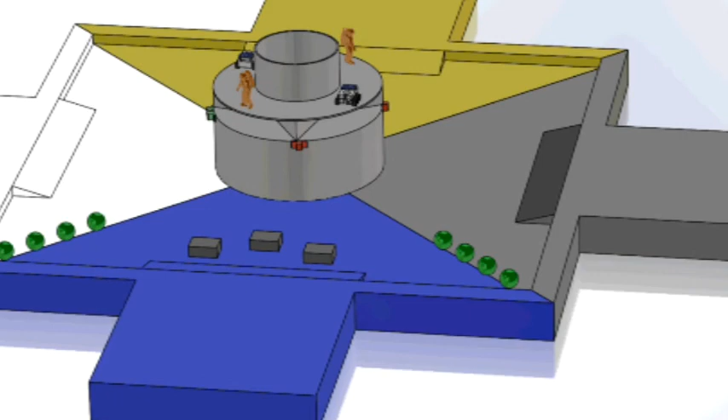The final design project presented 5 tasks to be executed by a machine. 1. Clear the surface of radioactive elements. 2. Collect rock samples. 3. Land spacecrafts in a marked safe zone. 4. Retrieve injured astronauts and their rovers. And 5. Place your country's flag. The 5 tasks will be executed during a 45-second time period.

These 5 tasks are incorporated in the House of Quality. The strongest relationships on the House of Quality are between the specific tasks and the kind of mechanisms needed to complete those tasks. One important negative correlation is between the requirement of fitting in the go-no-go box and reaching the center of the cylindrical cavity.

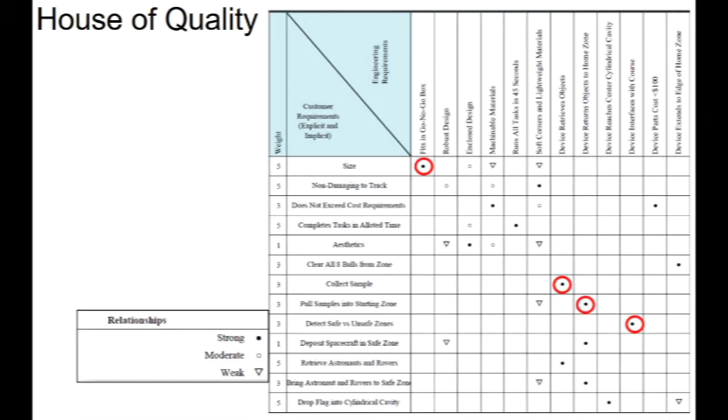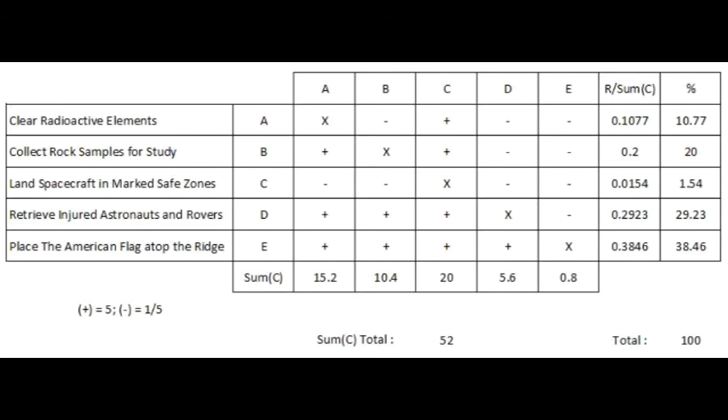The prioritization matrix indicates that the available resources should be focused on the criteria in the following order: place the flag atop the mountain ridge, retrieve injured astronauts and rovers, collect rock samples for study, clear the radioactive elements, and lastly land the spacecraft in the marked zones. Construction throughout the class was based on this evaluation.

The first design focuses on 3 tasks: pushing the radioactive elements out of the home zone, pulling the rock samples into the home zone, and retrieving the astronauts and rovers. This design utilizes an open base, a retractable arm, 2 extendable arms, and a scissor.

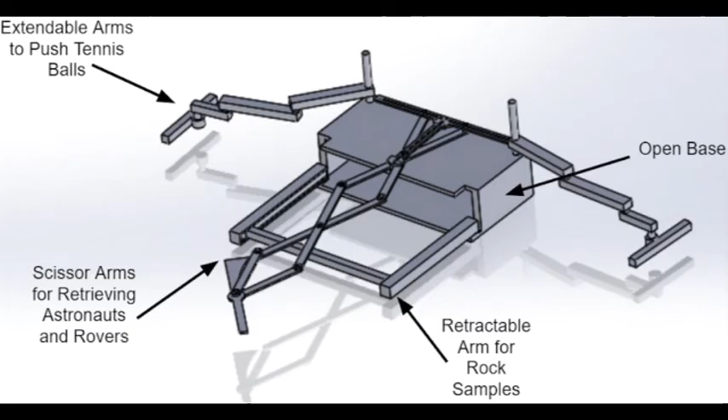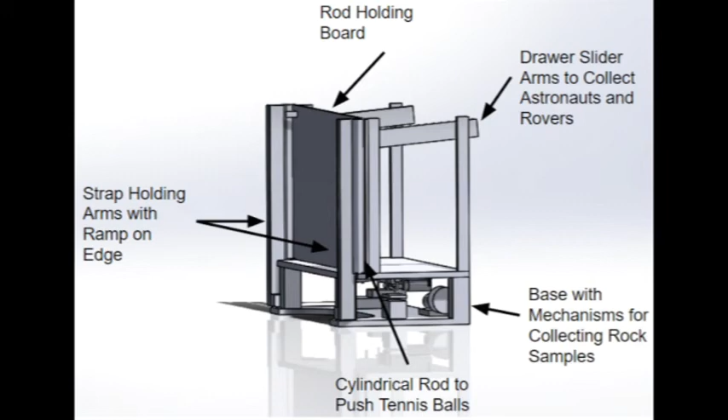The second design completes the same 3 tasks of pushing the radioactive elements out of the home zone, pulling the rock samples into the home zone, and retrieving the astronauts and rovers through the use of scissor arms, motors, and machinery. The third design attempts to collect rock samples, retrieve the astronauts and rovers, and remove the radioactive waste in the home zone. This design incorporates drawer sliders, a hook, cylindrical arms, and an open base.

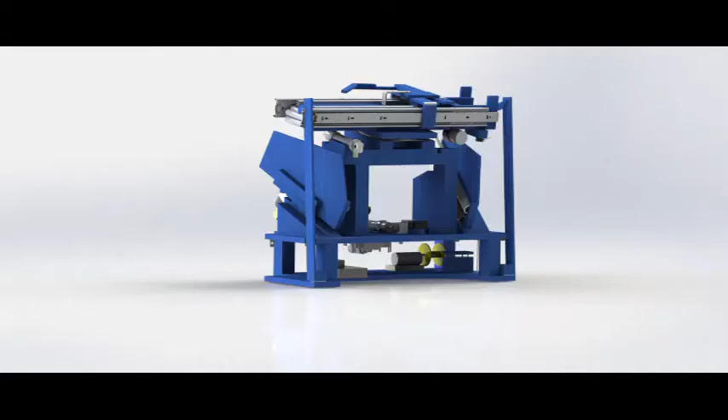The fourth design is based around a moving cart. This concept focuses on all tasks except for rock collection, utilizing a mobile system with extendable arms. The fifth and final design completes all 5 tasks with consistent accuracy. This design incorporates trigger arms, a strap, a throwing ram, a swiveling subsystem, drawer sliders, extendable arms, and a ball releasing mechanism.

The most unique aspect about our design is the horizontal orientation. We decided to go with horizontal orientation because of our initial design for the rock collection, which we actually still have. This is still the same initial design. So I'm going to demonstrate that for you as step 1.

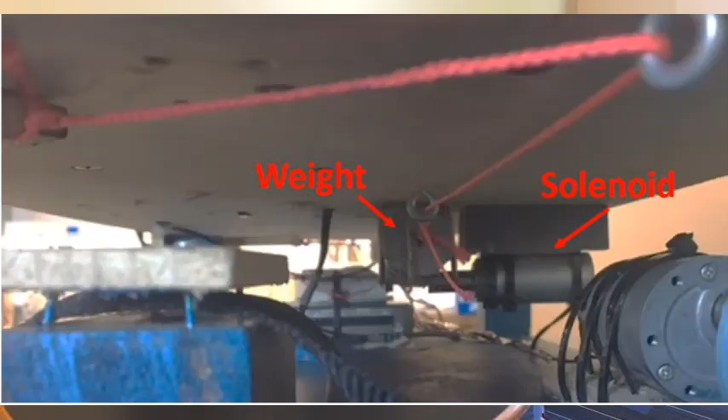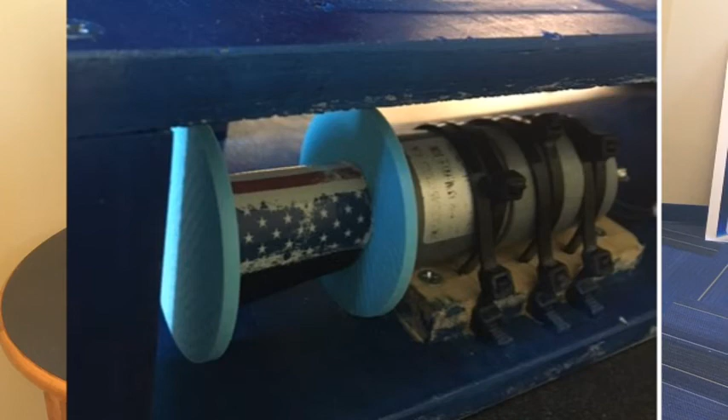So what happens is a solenoid back here pulls back, and a weight is resting on top of it that's attached to some strings, which connect to lever arms that drop these arms down. So I'll go ahead and show you that. The solenoid dropped, the weight came down, and the straps came out. Then a motor runs back here and winds up the straps and pulls the rocks all the way into the system.

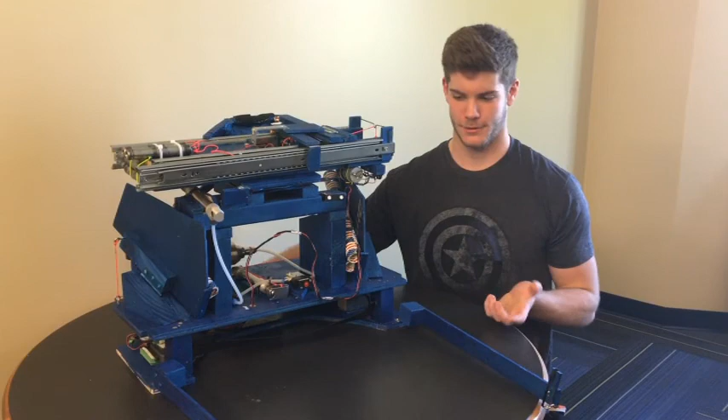After the rock collection, the second subsystem is fired by this valve, which releases the air from the tank into the 2 actuators here and here. The first actuator fires the tennis ball clearing mechanism, just like this. The second actuator is crucial because it allows us to maintain the horizontal orientation while still reaching the center mountain ridge. When it fires, the entire top system rotates and locks into place here.

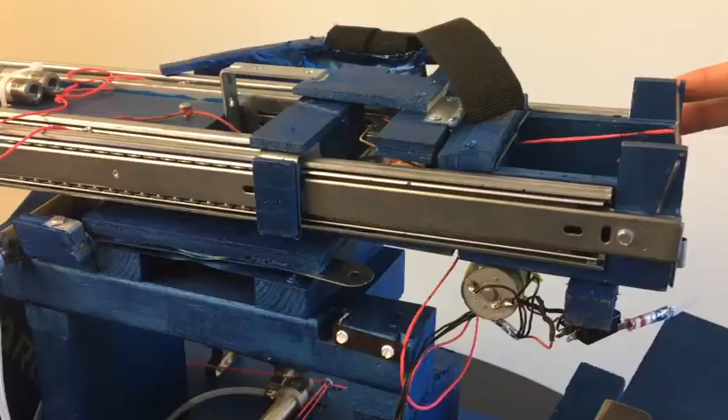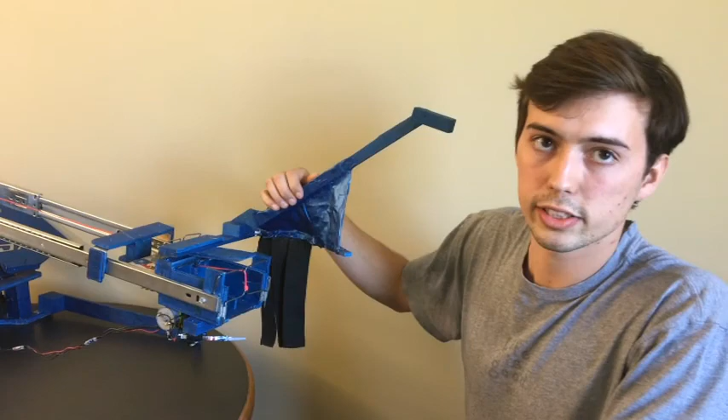The final step for our machine is reaching the mountain ridge system, and this is where most of the points are located. So we have an arm that fires, that deposits the flag into the cylindrical cavity, as well as collects the astronauts and rovers. The main issue we ran into while testing was the astronauts and rovers would fall through our arm, and then it would score points for our opponents. So we created this nice system that allows the astronauts and rovers to smoothly fall into our home zone. We also have these straps to prevent the astronauts and rovers from bouncing into our opponent's home zone.

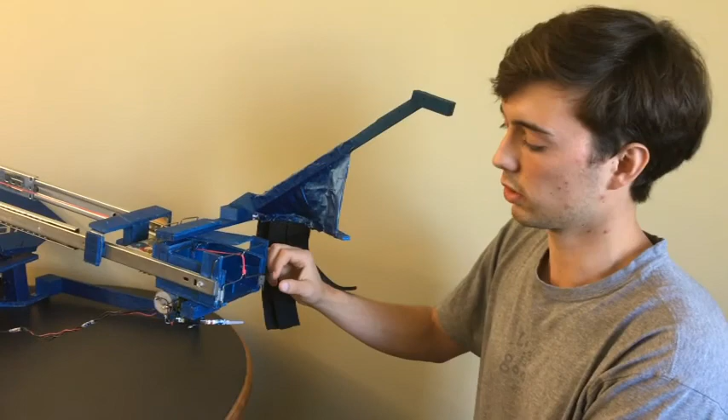The third aspect of our mountain ridge subsystem deposits the spacecraft into the safe zones. This switch detects the safe versus unsafe zones, and then a motor pulls the gate up, releasing the squash balls into the safe zone.

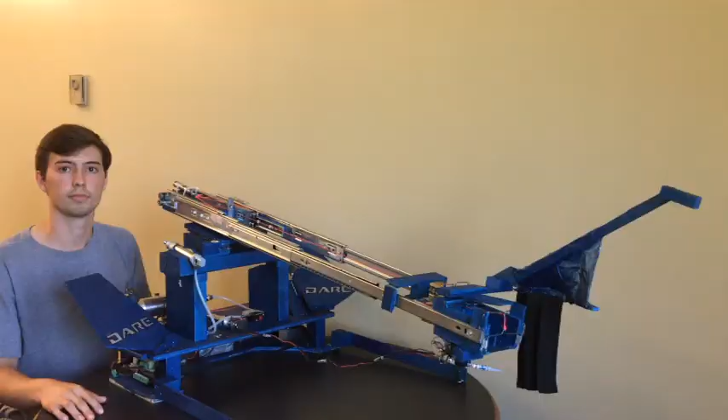The mountain ridge subsystem requires a lot of accuracy, so we created some systems to allow for adjustability between the tracks. One of these things is removing the weight, which slightly drops the height of the front system. The other is adjusting the string, which allows for a change in the length when reaching the cylindrical cavity.

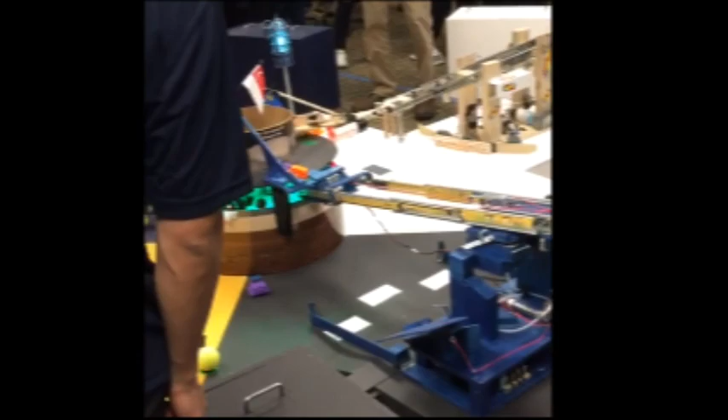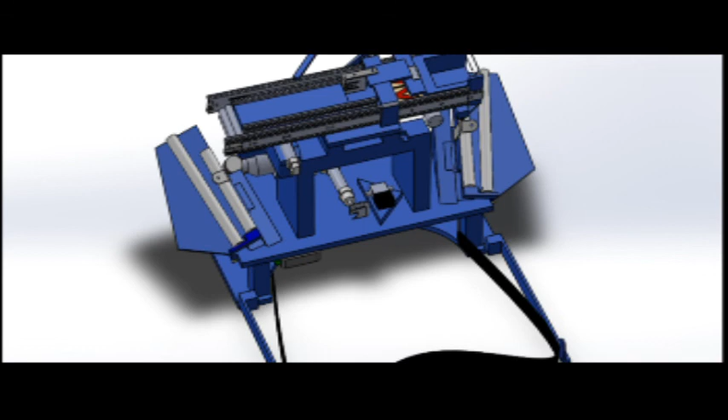The design performed as expected. Our prediction showed an average score of 179.5 per round, which proved to be very accurate during the later rounds of the competition. Team Dare came into the competition seeded 18th and finished 5th in both the design and head-to-head competition. Our highest scoring round was round 3 when the team scored a total of 206 points, breaking the record for most points scored by any team throughout the entire competition.